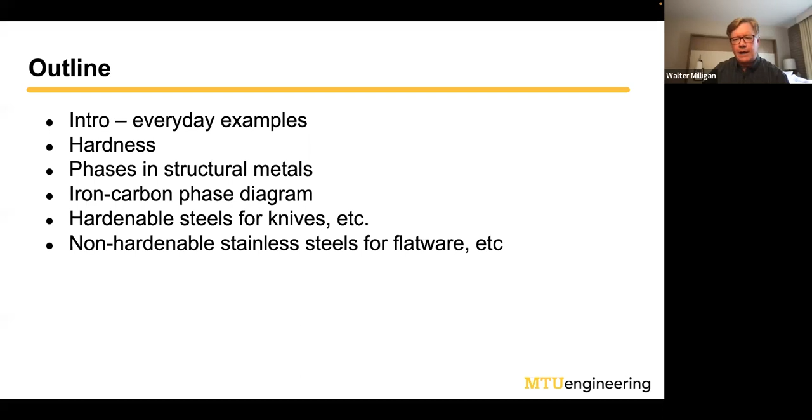First, I'll talk about some everyday examples, as mentioned in the publicity for the talk. I'll cover the concept of hardness and how we measure it, phases in structural metals, and phase diagrams so we can understand heat treatment. Then I'll discuss hardenable steels for knives, and non-hardenable stainless steels for flatware like knives, spoons and forks you might get as a wedding gift. We were going to talk about cast iron pans too, but I ended up with too much material, so I'm hoping I don't take too long.

If you ever go shopping for high quality steel products, you'll see the word 'tempered' a lot. Here are some examples. This is an ice scraper, and it says forged and tempered. You might have noticed on the New West Knife Works video that there was some forging going on—they put steel blocks into a furnace, got them red hot, and smashed them into shape, ending up with a knife.

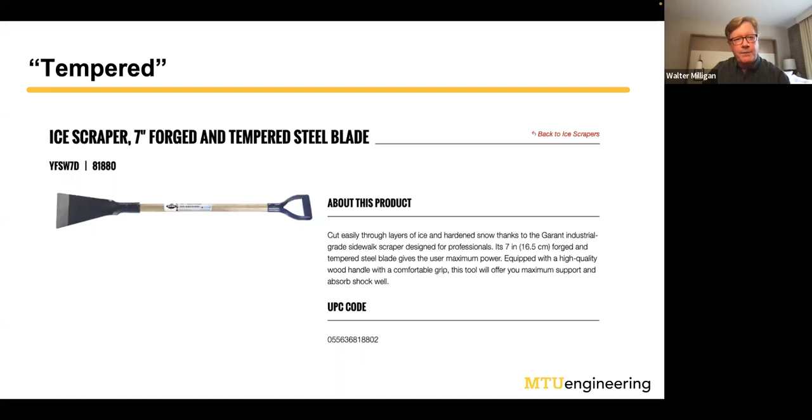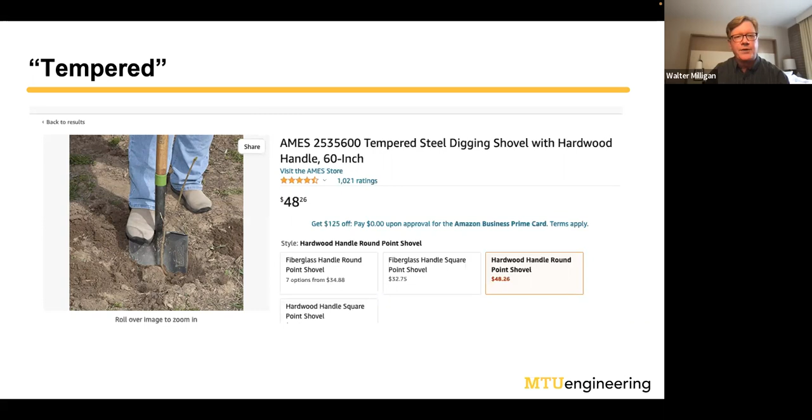Here's an example off of Amazon—a pretty expensive shovel, tempered steel. It's $50 instead of $12. The tempering is a heat treatment process that we'll explain in detail today.

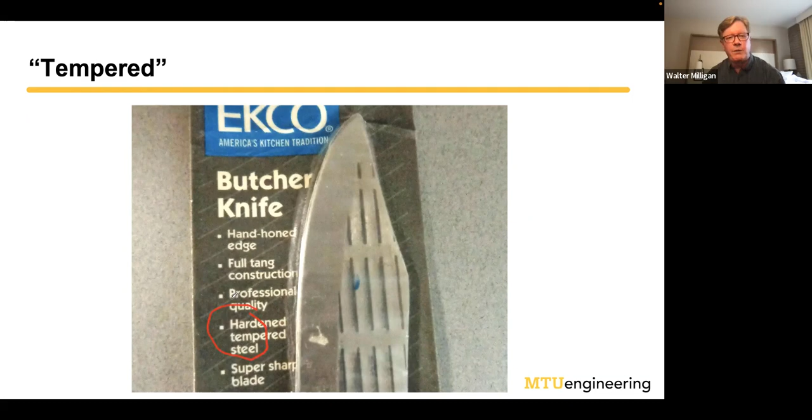I don't know how many people have seen the show on the History Channel called Forged in Fire. They have a contest where contestants try to make swords, knives, or something of a certain design, then go back to their garage and come back with their knives later. Here's an example of a kid who tried to make a sword. This will describe one of the processes in the heat treatment step called quenching.

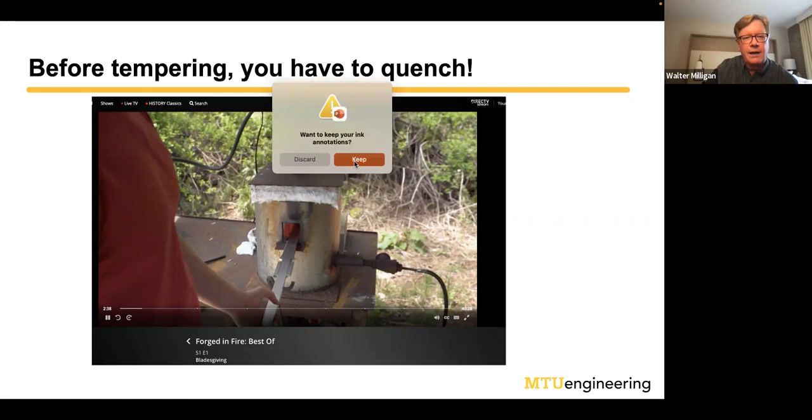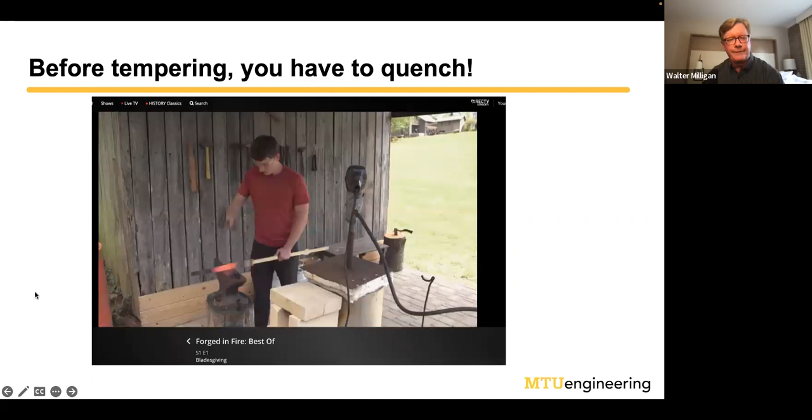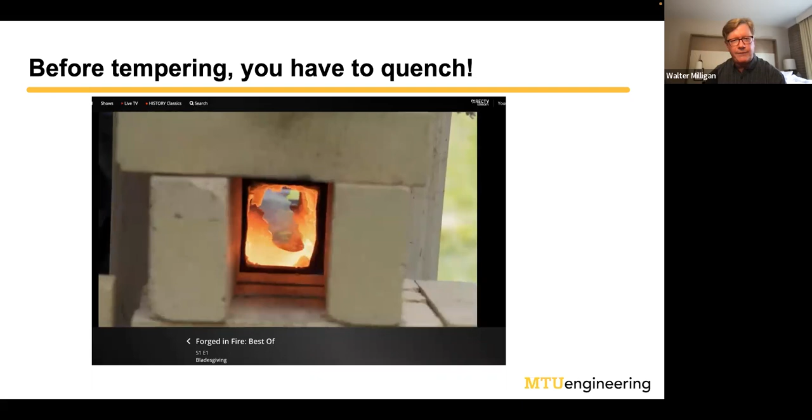He's smashing the sword into shape, he's got it red hot. After he smashes it into the rough shape he wants, he puts it in the oven and gets it glowing red hot. Then he takes it out and dumps it in a fluid. You can see that safety is not his strong suit. So the question is, why do we do that? Why did he have to take the sword he'd forged, put it back in the furnace, and then quench it? That's one of the key aspects of making a sharp knife, and we'll get into that.

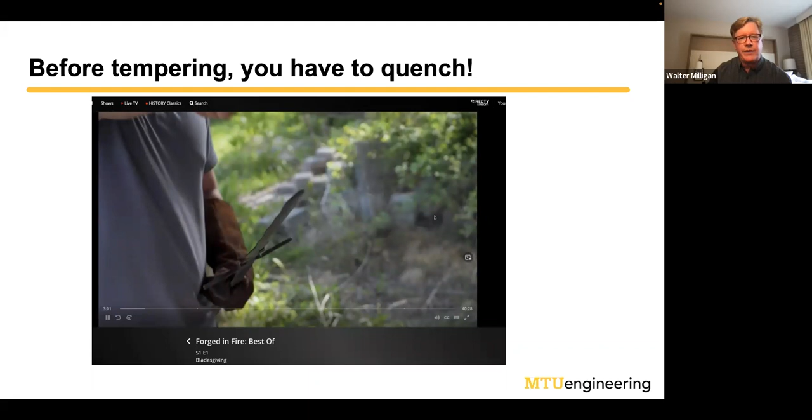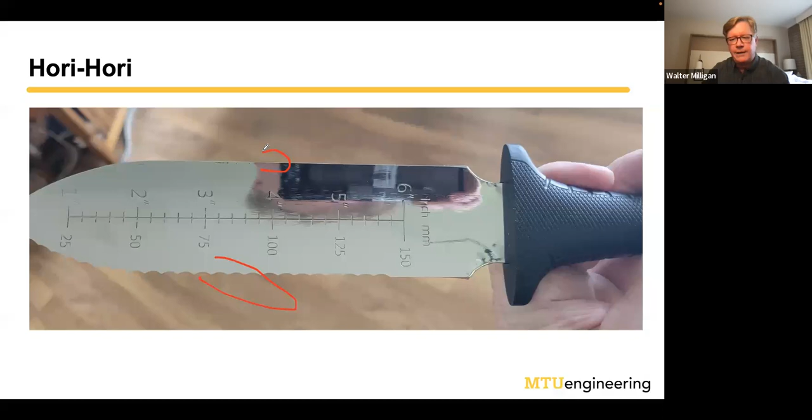Here's another example of a hardened steel device. I don't know how many people have heard of this, but there's a device called a hori-hori, a Japanese name—basically a sharpened garden trowel developed for planting bulbs and cutting roots in Japan. You can see it's got a scale on it, so if you want to put your bulb to a certain depth you can measure it. This one has a serrated edge down here for cutting, and a very sharp edge up here. This is also heat treated in the same kind of way. You can see it's got some curvature to it.

One reason I'm doing this talk is because Janet and I were talking about this. I got this from my wife—she likes gardening, and Janet loves gardening too. You should see the front yard of her house, it's beautiful, she's out there all the time. She liked this so much that she bought one for herself. We'll have another story about that later.

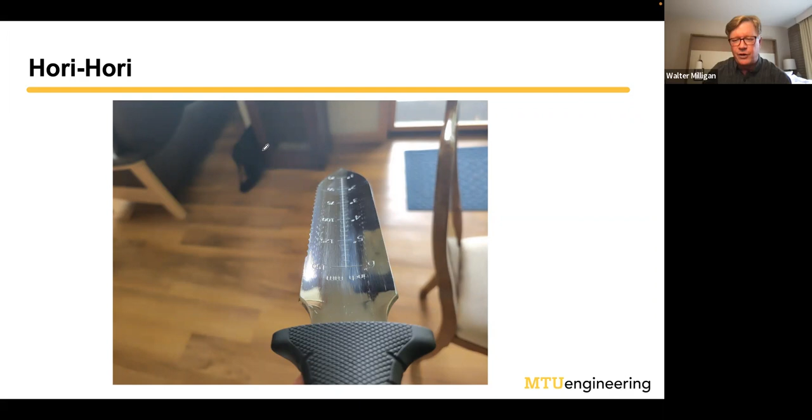This is the front of the case on the hori-hori that I bought. You can buy these for $12 on Amazon and probably at Walmart, or you can spend $60 like I did. And when you spend $60, you get a high-end stainless steel. I'll explain that composition a little bit later.

You can see down here, it says full quenching, and I'll explain the full part, which is a little bit more in depth than you might guess. It also tells you what the hardness is up here, and I'm going to explain what hardness means in a bit. This particular thing is heat treated to a hardness of Rockwell C58, which is not super high for a high quality chef knife, but it is very, very high for a garden trowel.

So what exactly is hardness? People have probably heard the term. Hardness has a specific meaning for metals, and basically it's tested by this benchtop device over here on the left. Every materials department and every factory that makes these kind of things has many of these in place. They're not very expensive, but they're on a benchtop. What they do is take an indenter, and the shape and the material that the indenter is made out of depend on how hard the metal is.

And I'll play this video, hopefully. It's not letting me use the pen and the video at the same time. So I apologize for going in and out.

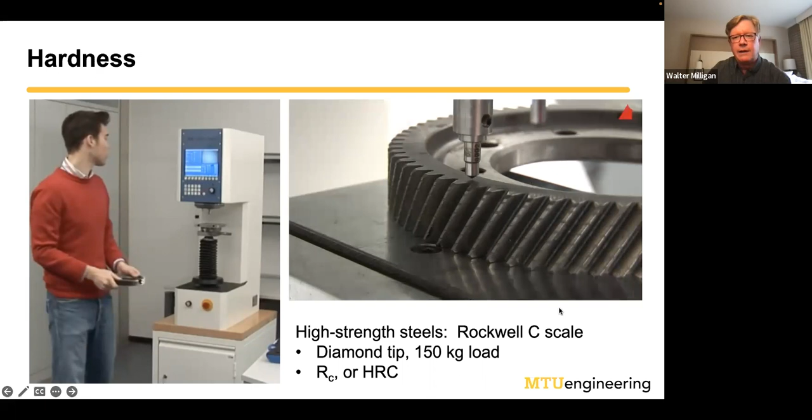In modern testing machines, the Rockwell hardness test basically takes that diamond tip indenter and it goes down and makes an indentation in the metal. I don't know if you can see it going up or down, but then the machine automatically detects the depth of the indentation, and the deeper it goes, the softer the metal is, and it displays the hardness on the screen. It's a very rapid test.

You can do this in 30 or 40 seconds. It's non-destructive, so you can actually test your part and then put it in service in some cases. This is the standard way we measure the performance of things like knife steels. Most knife steels are going to have the Rockwell C scale, which is what we showed on the Hori Hori. That means the indenter is a diamond tip with a 150 kilogram load, and it's reported as a hardness of HRC, or sometimes the symbol capital R subscript C for Rockwell C.

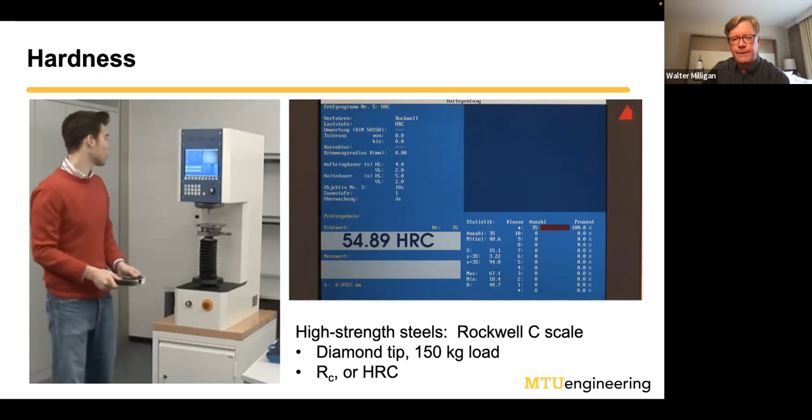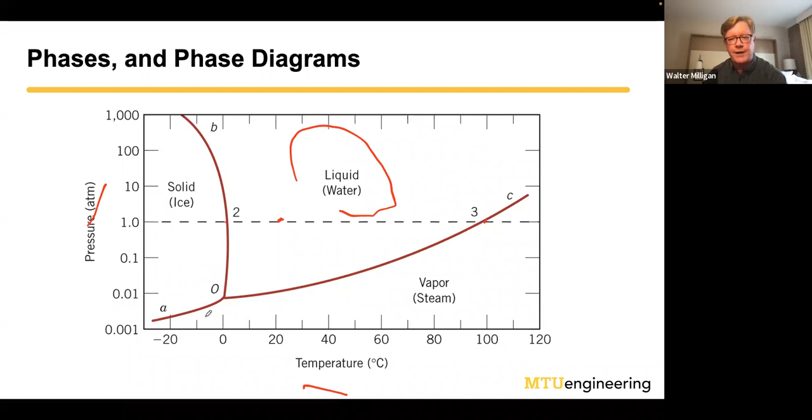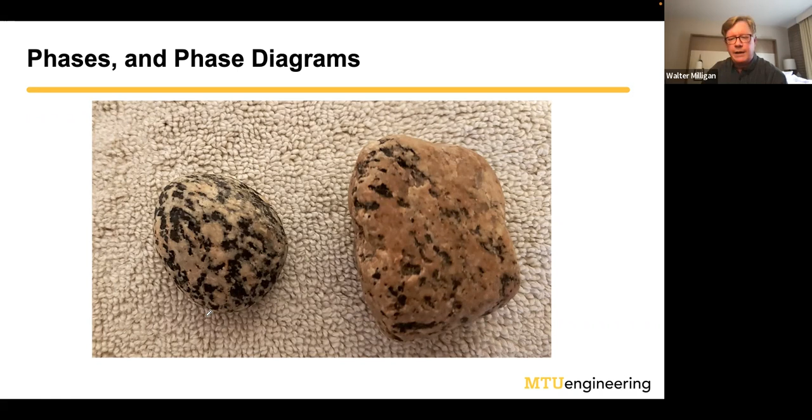It's going to turn out that structural metals have exactly the same thing as we showed on the rocks there. High performance structural materials are going to be made out of materials that are more than one phase. I almost didn't put this in, but I decided to put it in. Again, I apologize for having to get out of here. But basically, all metals are crystalline in nature.

So, for example, if you've got a chef knife, and it's nice and sharp, and then you cut into a bone or hit your cutting board a little bit too hard and it gets dull, what's happened is that billions of these defects have moved. That's why it changed the shape from sharp to dull. The point here is if I can take something in the microstructure and put it in the way of this thing moving, we can increase the strength. That's why high performance metals all have 2 phases, because the second phase can get in the way of this dislocation moving. When it does that, it increases the strength of the material.

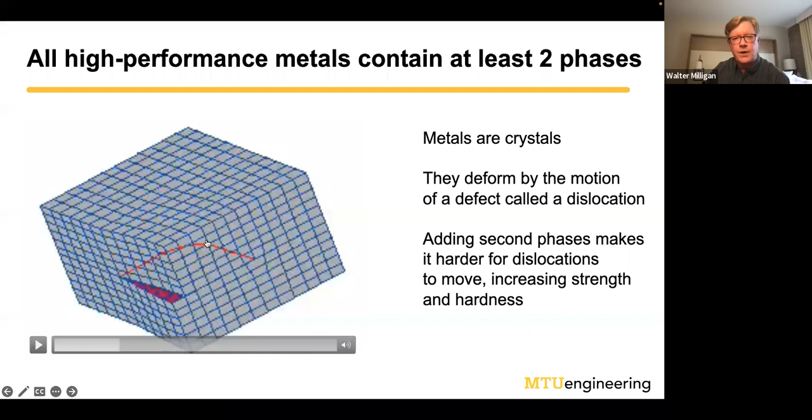I'm proud of you for using the dislocation word, Walt. Thank you, Janet. I almost didn't do it.

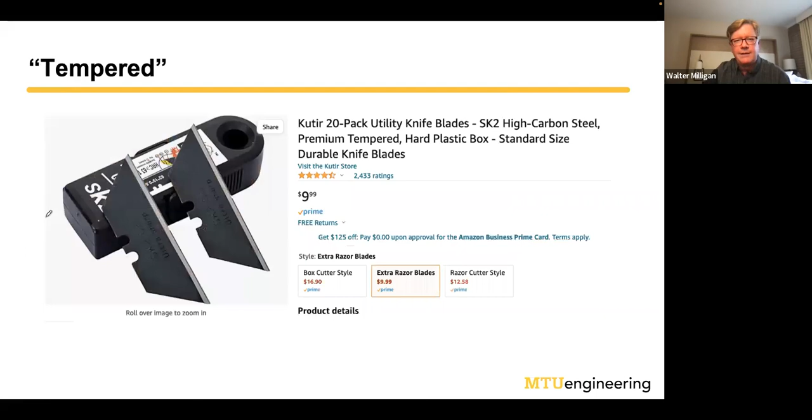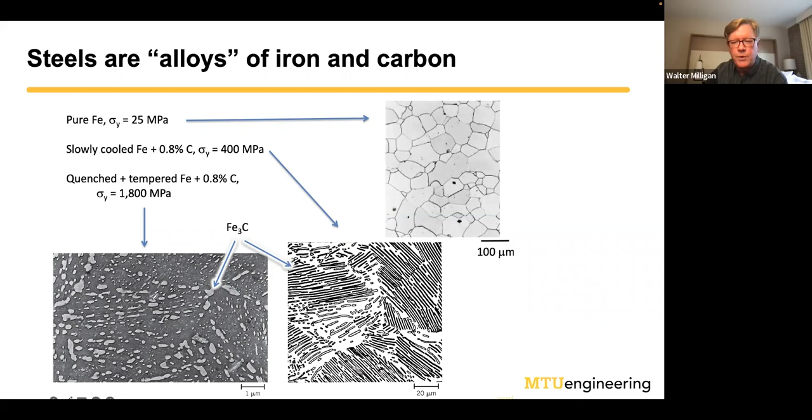So this is going to give us two phases, and that iron carbide phase is going to be able to strengthen the material. If I go back and look at this picture, these white blobs are the iron carbide particles, and over here these worm-like features are too. This one is at much higher magnification in an electron microscope. These carbide particles are much finer and much closer together than over on the right, which is one reason it's harder. Basically, the harder you want your steel to be, the smaller you want the carbide particles, so they're more numerous and closer together, so they can inhibit the motion of dislocations and increase the yield strength.

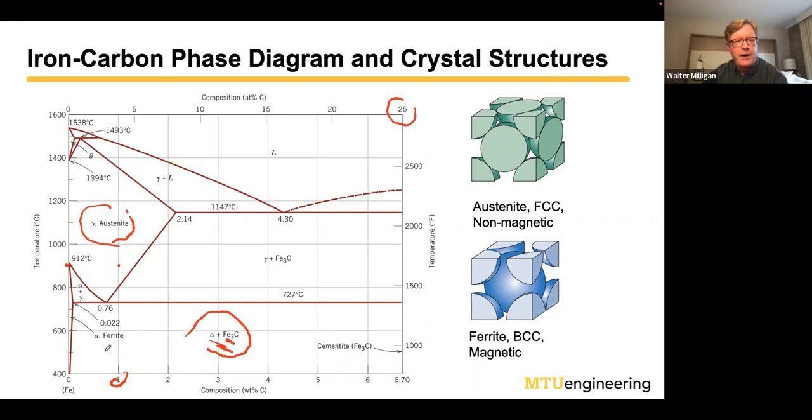It turns out the difference between these two phases is not just crystal structure, but also the austenite phase, which is at high temperatures, is not magnetic. And the ferrite, which is at lower temperatures, is magnetic.

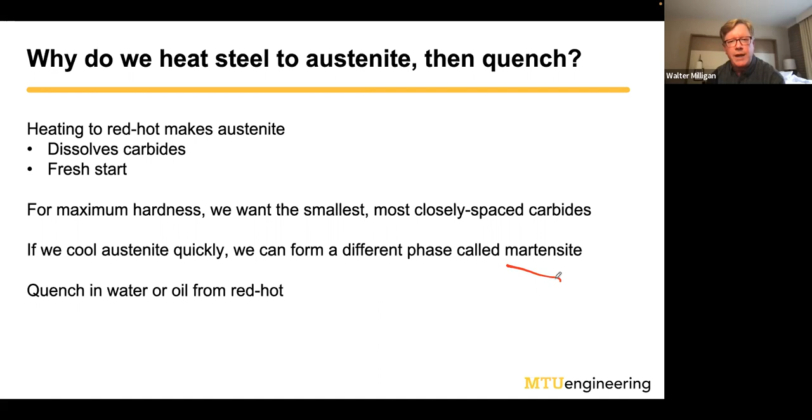The reason that works is we form a new phase called martensite that doesn't show up on the phase diagram because it's not an equilibrium phase. So we're going to quench the material from red hot in water or oil, and when we do that, we're going to transform the austenite into a new phase called martensite.

I'm going to show you some videos. Maybe I can do this without getting out of here if I do that.

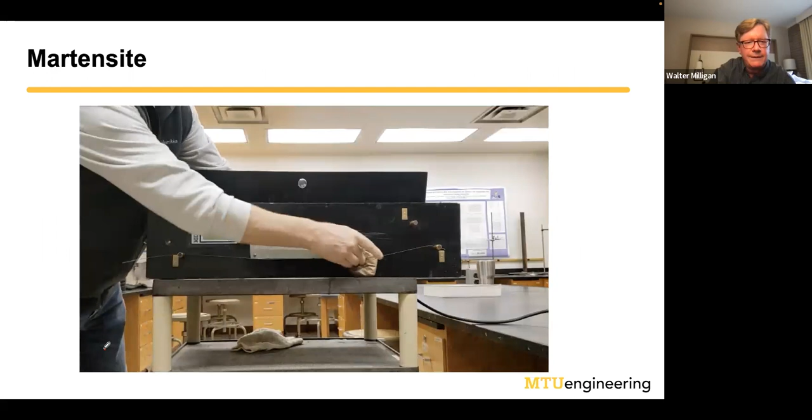So this is a device that we have in our lab for demonstrating heat treatment. Those of you that were at Michigan Tech before about 1993 will recognize the old MTU logo there on the upper left-hand side. What this device is, it's like a light bulb. We have two electrodes here, and we have a wire in the middle, and we can heat it up by just running current through there.

So you can see right now that this steel wire I have in there, this is piano wire, has been heated up. It's red hot. And what I'm going to do is I'm going to quench it.

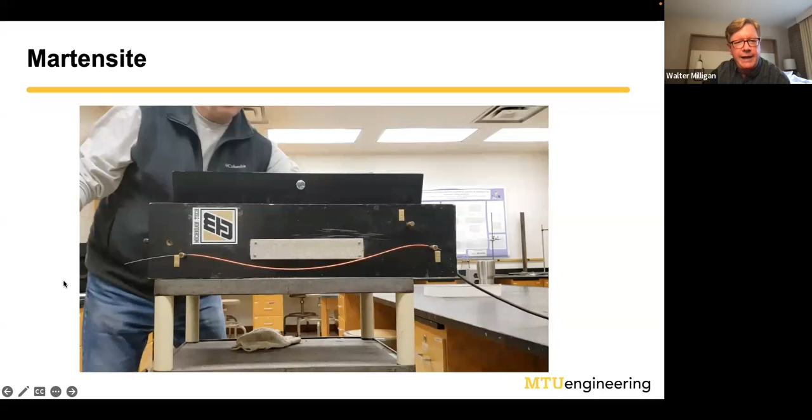I'm not going to quench it by dumping it in water because it's a wire. What I'm going to do instead is take a wet paper towel. I'm going to turn the power off, and then I'm going to quench it in that order.

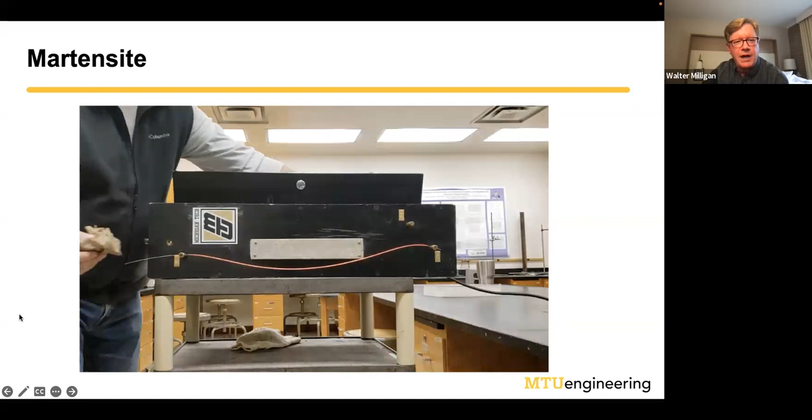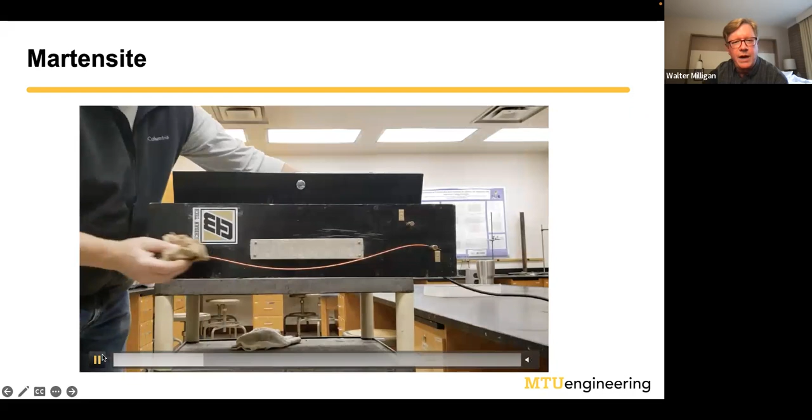So I'll play that again. It's red hot wire. I turn the power off so I don't electrocute myself, and I just hit it with a wet paper towel really quickly. And so that is a quenching operation. Then I'm going to show you in the next video what the properties of that material are.

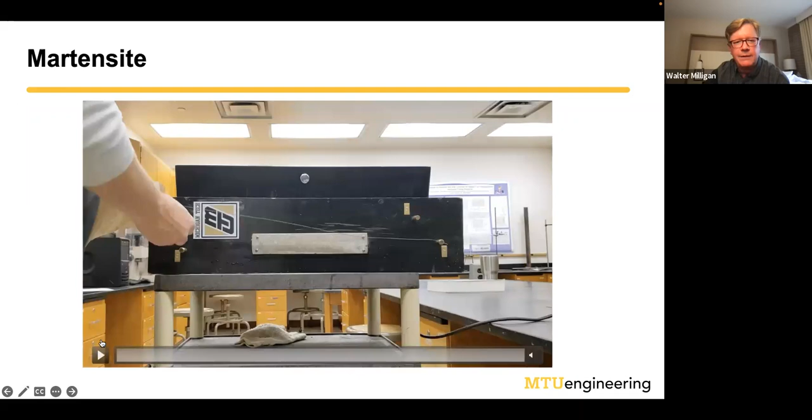Turn the sound off again. So I'm going to take the wire off of there.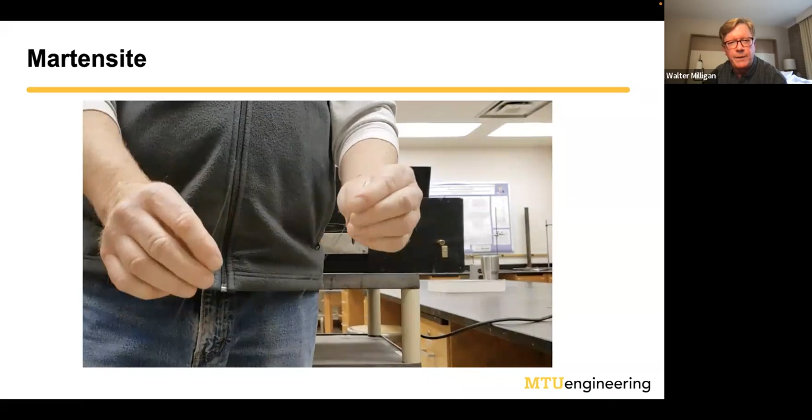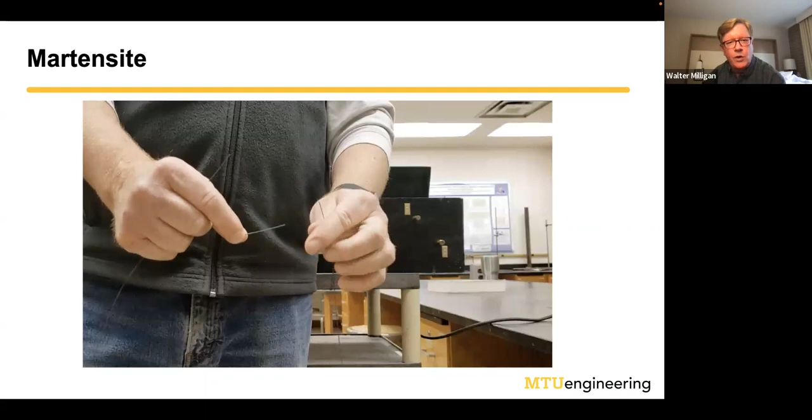It's incredibly brittle. It's like glass. If you would have done anything else to that wire, you could have tied it into a knot. This martensite phase that we form is absolutely useless. The reason that we form it is because it's an intermediate step in order to form the microstructure that we want at the end. So let's get into that next.

So why do we want to make useless martensite? The reason is we can take that martensite and reheat it to an intermediate temperature. These temperatures are typically around 200 or 300 degrees C, the kind that you could get in your home oven, like a pizza baking temperature. What happens is the martensite transforms to the stable phases of ferrite and carbide. That final step is called tempering.

So it's kind of like the steel was in a bad mood, so we had to temper it. I think that's where it came from, just shop jargon from 200 years ago or whatever.

So when you see these products online or at the store and they say tempered, what they mean is that we had a 3-step process. We heated it up red hot to austenite, and then we quenched it, and we formed a really useless brittle phase. And then we reheated it a little bit and tempered it.

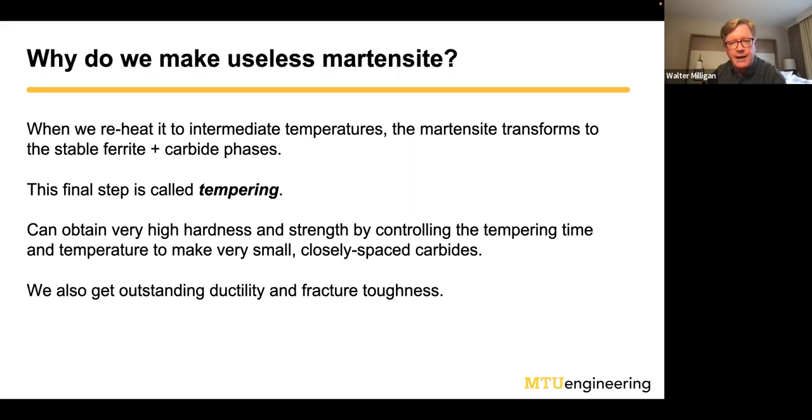And when we do that, we can have a very, very high hardness, and we can have very, very fine carbides, many of them that are very close together. So we can get a very high hardness and a very high strength. The amazing thing about these steels is they also have unbelievably high ductility and fracture toughness. That's one reason why these are so useful, not only in knives and things like that and in hori-horis, but also in a lot of engineering materials and components.

The way you control the properties after the quenching step is by controlling the temperature and the time of the tempering. This plot here shows a tempering curve. On the left-hand side, we have hardness, again in Rockwell C. On the x-axis, we have time in the furnace. This is the same steel that I showed you that we did the quenching on. So this is piano wire.

So, for example, you can pick whatever temperature you want and then pick the time if you have the data for your steel. So, for example, if I wanted to take this steel and temper it at 200 degrees C for about an hour, it should have a hardness of about Rockwell C62, which is harder than the hori-hori. It's also a pretty good hardness for a plain carbon steel like this. As you increase the time or the temperature, the carbides grow more quickly, and so the hardness goes down. It's not always a bad thing.

For the hori-hori, for example, which is not made out of this steel, we'll get into that in a minute. It turns out the hardness is about Rockwell C58, so it's not going to be as strong as it is here, but it's probably going to be tougher and more ductile and easier to form, and it might not be so prone to chipping in a very sharp edge.

So once again, the 3 steps we have to do here are: heat it up to the high temperature austenite, quench it to form martensite, and then after we form the martensite, we have to get rid of it. So we temper it for an amount of time, and the result of that microstructure is called tempered martensite, even though there's no martensite there. That drives students crazy in the intro class I teach, because it's called tempered martensite and there's no martensite there. We called it tempered martensite because that's how we made it.

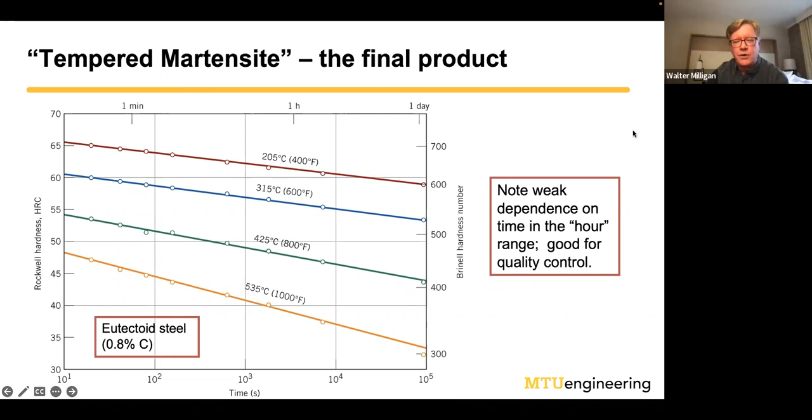I also note that if you're doing industrial operations, there's a very weak dependence on time. So if you go from 1 hour to 2 hours, the hardness only changes a little bit. That's a good thing if you're doing quality control, because you don't want your thing to get too soft if they left it in the furnace for a little bit too long.

So now let's talk about the real stuff. Let's talk about the stainless steels that those $400 knives are made out of. Piano wire is fine, but the products we're interested in today are stainless steels.

So the definition of a stainless steel is an alloy that contains iron and chromium. The reason they're stainless is because the chromium oxidizes on the surface and forms a protective coating. That coating keeps further oxygen from going into the material and oxidizing it, turning it into rust, or doing other bad things to it.

So all stainless steels have chromium in there. Some have carbon intentionally - we'll talk about that. Some require very low carbon - I'll talk a little bit about that. Some have nickel, and there's, I don't know, thousands of different kinds of stainless steels, but we'll talk about some examples of the most common kind.

So there are 3 basic classes. We can have martensitic stainless steels, and they are hardenable, just like we showed in the carbon steels, and the process is exactly the same - we have to austenitize, then quench, then temper. The carbides we get are different, they're not Fe3C, I'll talk about that in a bit. But these are hardenable and very high performance for knives and shovels and horis and things like that.

We can have ferritic steels that are not hardenable, much more low cost and much more affordable, with moderate corrosion resistance. And we can also have austenitic stainless steels, which are more costly and much more corrosion resistant.

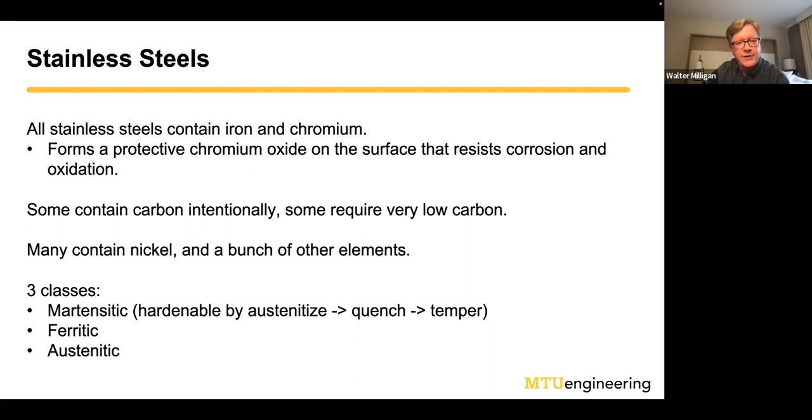So we'll talk about the martensitic stainless steels first. The most common one you'll come across if you work with these things is a steel called 440C. If you try to buy something online and they call it surgical stainless steel, this is usually what they mean. So you can see the composition up here - this has 18% chromium, which means it's much more expensive than plain carbon steels because chromium is expensive.

It's got pretty high carbon, more than the 0.8%, and it's got a little molybdenum in there for heat treating purposes. We do the same processes to this - we austenitize it, we quench it and temper it. It's strengthened by basically Cr23C6 - not just chrome, but it mainly is. And so we can get very high performance by doing that.

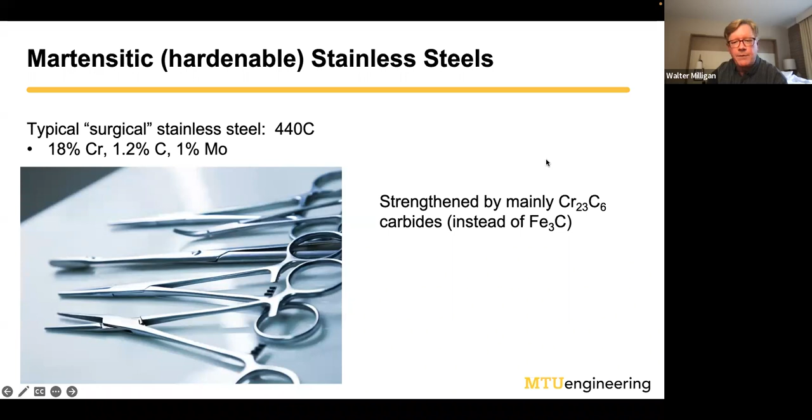And so the steps necessary in this knife steel, and probably in the knife steel that New West uses, I'm assuming, are: we have to austenitize and quench to get martensite.

Because of the composition of the steel, we don't get rid of all the austenite if we just stop at room temperature. That retained austenite will not temper, and it ends up being a soft phase that hurts performance. So when they say full quench, what they mean is they actually had to cryo quench it, put it in liquid nitrogen or a bath of dry ice, depending on the temperature, to get rid of all the retained austenite. Then they temper it. If you don't do the cryo quench step, you're only going to get 52 Rockwell C, because the retained austenite will be a soft phase in there, and you won't get the full benefit of the material composition.

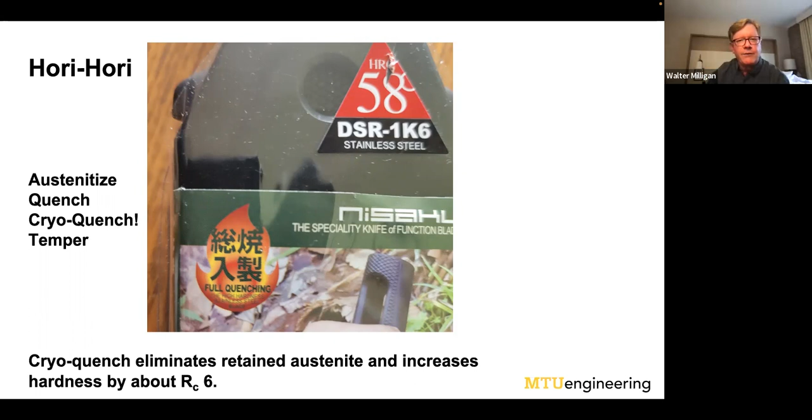This is a picture of my new hori, and if you read the label, you can tell the Japanese manufacturers maybe need some help with their translation of English there. It says 'the specialty knife of function blade' - don't know what that means, but I can tell you this serrated edge is very, very sharp, and this straight edge is incredibly sharp. It's 58 Rockwell, so it's not sharp for a chef knife, but for a garden trowel, it's incredibly sharp.

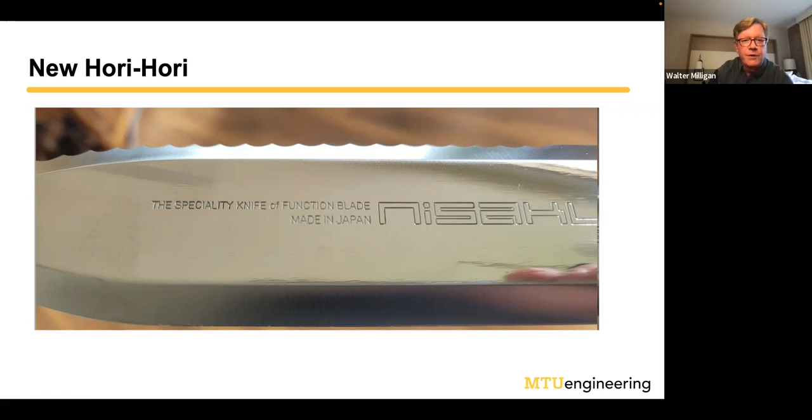Janet was digging in the garden one day using two hands, and she actually almost cut her finger off. So she got mad at it and took that knife and rubbed it up against a brick to get that sharp edge to be a little bit less sharp, so she wouldn't cut her finger off. It's still pretty sharp - just not so sharp that touching it cuts you now.

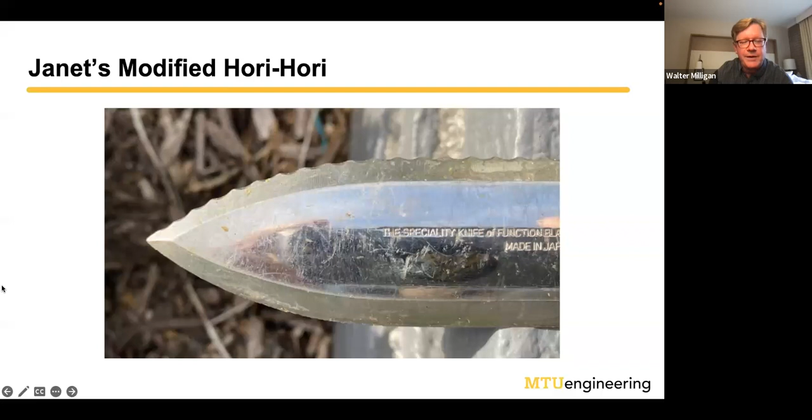58 Rockwell C is not bad for a garden trowel, or even for a kitchen knife. It's also relatively stainless - you can see there's a little bit of staining on there, but it's a really cool tool. I really like it. Janet does a lot of gardening; it's what she does a lot in the summer.

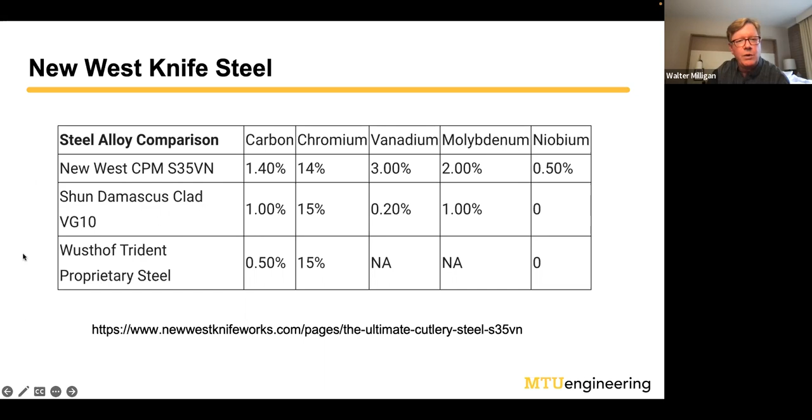In fact, New West has a lifetime deal where when your knife gets dull, you can mail it to them and they'll sharpen it for you, because if you're at 70 or 72 Rockwell C, that's going to be really hard for an amateur to sharpen. So it's a combination of good sharpness - it'll get dull quicker, but it's pretty sharp when you do it, and you can do it with one of those knife sharpening devices you can just buy in the store.

So a quick word about storing your knives. Hard, sharp edges can chip, so don't throw them in the drawer. I think most people know that.

I think I've used this chef knife every single day for the last 10 years, and it's held up great. Maybe I'm going to buy a New West knife after I saw what these guys make, because it looks pretty spiffy. But this has been a great knife, and I sharpen it every once in a while, once a month or every month or two, and it does a really good job.

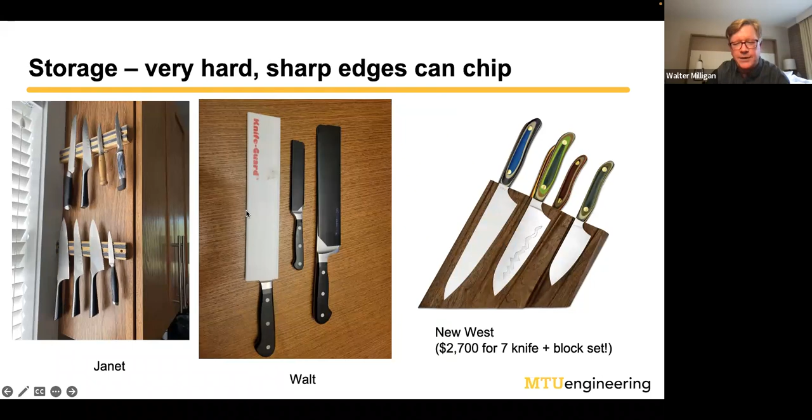Janet just bought one of these. It's a picture from the website because she's in Chicago, and even if it got here on time, she is not. No, it was delivered, I took this before I left. Oh, you got your knife. Mm-hmm, so it came with a leather sheath, I guess, right? Is that a leather sheath for it? Yep, it did. Yeah, so that's my approach here, except it's pretty leather instead of cheap plastic. So that came pretty quickly then. It sure did.

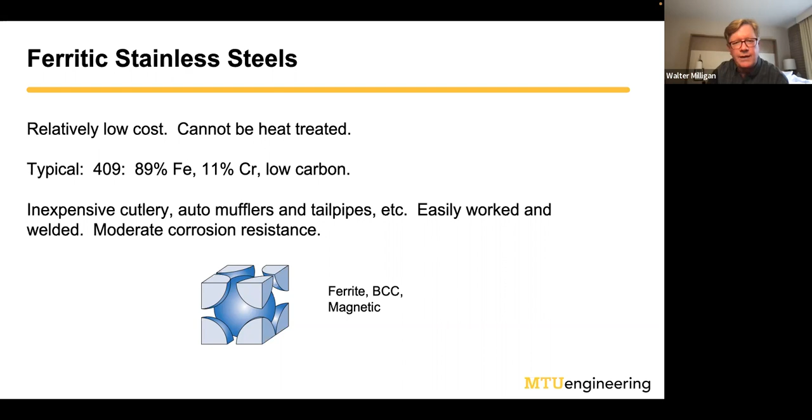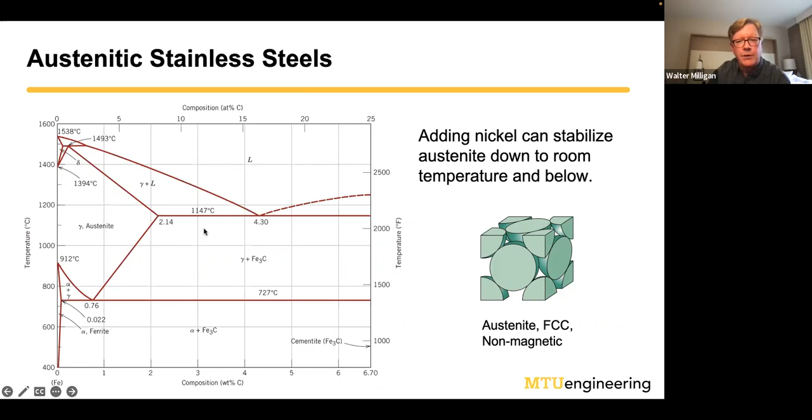The austenitic stainless steels are interesting. If you can add nickel to your steel, then you can take this austenite phase, which is not stable below 727 degrees C for a plain carbon steel—and 727 degrees C would be glowing red hot in the furnace, starting to glow red hot anyhow. If you went below that, the austenite is no longer stable. However, if you add nickel and chromium, you can stabilize the austenite phase so that it's actually stable at room temperature and below. So that's what these steels are going to be.

They're going to have chrome and nickel in there. The most common steel that people know about that's austenitic is called 304. Again, it can't be heat treated. It's got 18 chrome and 8 nickel. This is a very expensive material compared to other steels because chrome and nickel are both expensive.

In this particular case, you want very low carbon, because if you have carbon in these steels, they tend to form a chromium carbide phase at the grain boundaries, and that ends up giving you a corrosion problem. For example, if you're using this for a plumbing fixture, you can actually get pinhole leaks because of corrosion if you have carbides in there. So typically we want to have chrome and nickel and very low carbon.

This is useful for expensive cutlery like knives, forks and spoons. It's the most common material for plumbing fixtures. If you go to Burger King or somewhere, you see the shiny stainless steel countertops, they're all made out of this. It's also biocompatible, so some implant materials are made out of this. Once again, this is the face-centered cubic phase, which is austenite, and it's not magnetic.

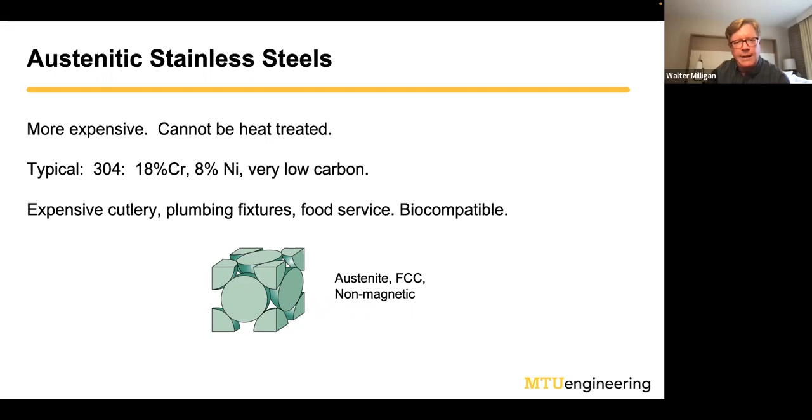So here's a demo that I filmed a couple of days ago about these knives or forks.

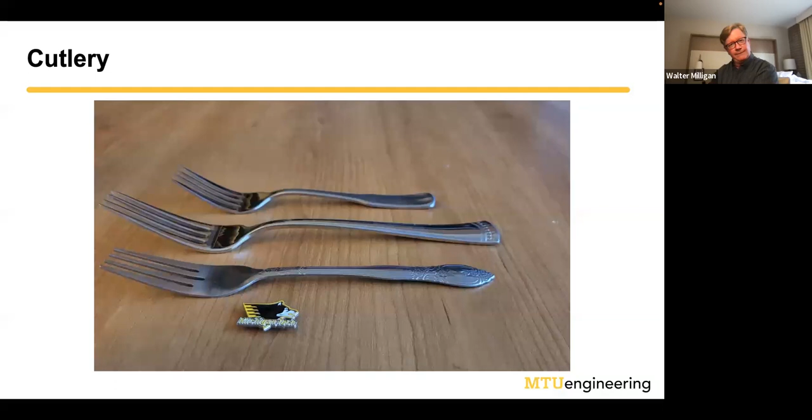To demonstrate the crystal structure that occurs in flatware you can buy at the store, I've got in front of me a magnet underneath the Michigan Tech pin there, and I have three different forks, and we're going to see how they behave when they come in contact with this magnet.

The front one is one that I paid $1.49 for at Walmart, and I have it at my office. It doesn't get put in a dishwasher, it doesn't get very much use, it doesn't have to look pretty, so I'm perfectly willing to pay $1.49 for it.

If I take that fork and put it anywhere near the magnet, you can see that it actually flew up and attached itself very, very rapidly. Once again, if I put the fork anywhere near it, it's going to fly up. The reason is that this is a body-centered cubic stainless steel, probably 409 or 430 or something like that — a little bit of chrome, no nickel, fairly corrosion resistant, and very much less expensive.

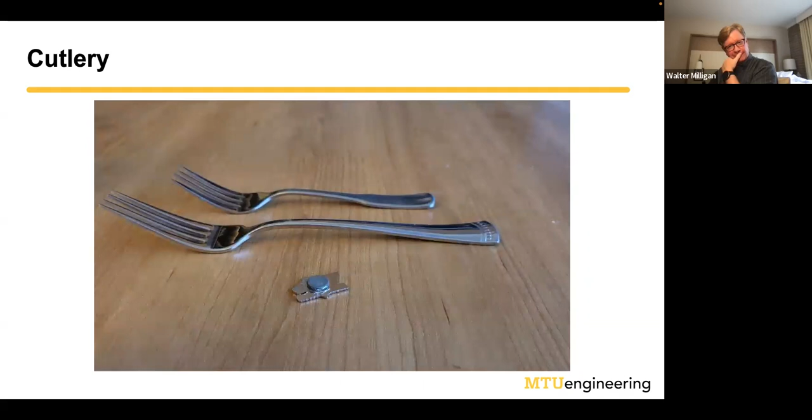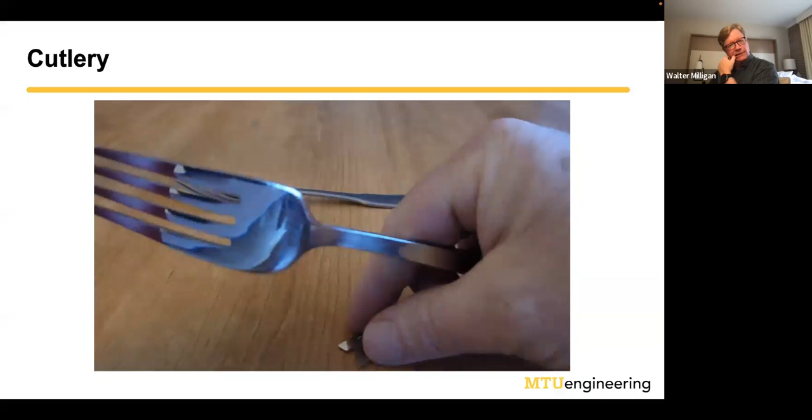The second one here is one that I think I got as a gift in a set, and this one is much more expensive. If I put that fork near there, it doesn't fly up until it gets very close to it. You can see that it also, even though it is somewhat magnetic, isn't nearly as strongly magnetic as the other one. So it kind of grabs on, but not really.

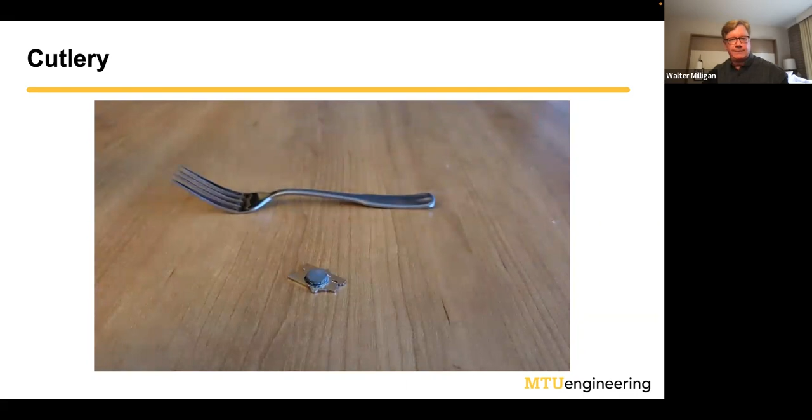Much less magnetic. In fact, you can put this through a demagnetization operation if you wanted to take the magnetism almost completely out, and that's one thing they do in industrial operations where they sell austenitic stainless steels. Here's the most interesting one.

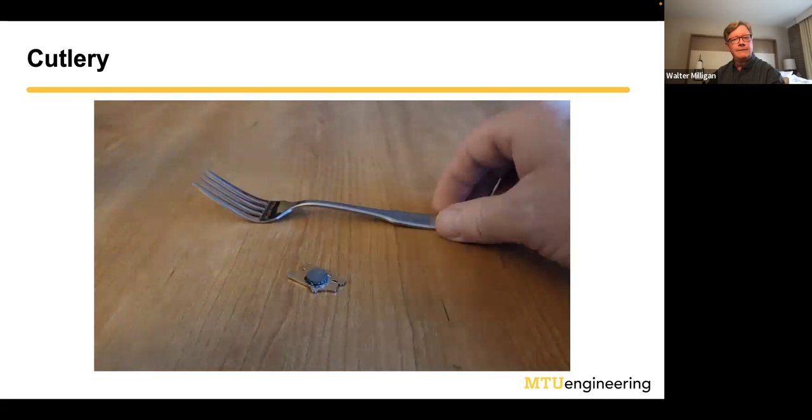This is a fork that my wife and I got as a gift a number of years ago in a set. It looks pretty fancy, and it was, I think, pretty expensive. So you would think that it would also be face-centered cubic austenitic stainless steel. And it turns out that's not the case — this is really interesting.

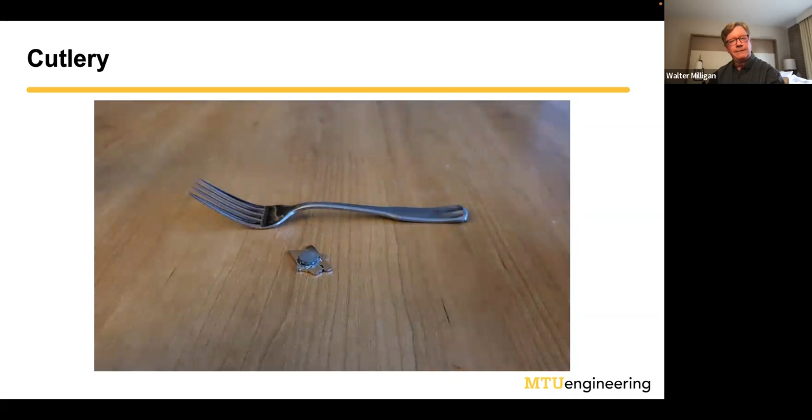I didn't really learn this until I made this video today and got a whole bunch of forks out of my drawer. But this fork, which was probably pretty expensive, actually is ferritic. It's body-centered cubic, and it's highly magnetic.

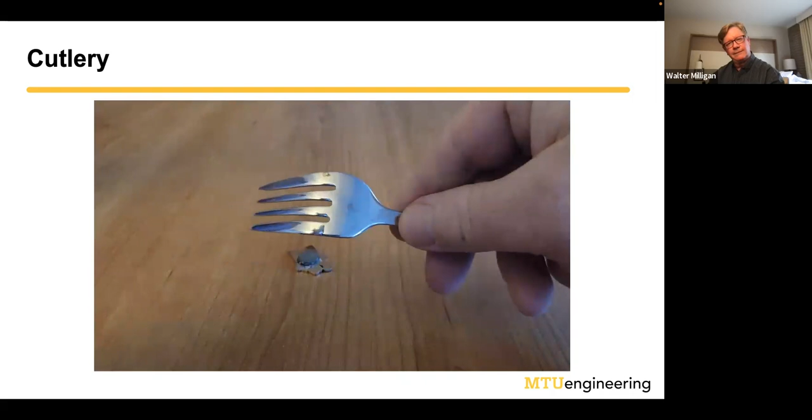And maybe that explains why, if you take a look at this thing, you can see the stain on there from the dishwasher. We've always kind of been mad at this set because the dishwasher ends up staining the fork. You can see that kind of orange stain there, and there's another one on the back that isn't showing up very well. My wife blames our water or our dishwasher, but really, it turns out the steel's cheap.

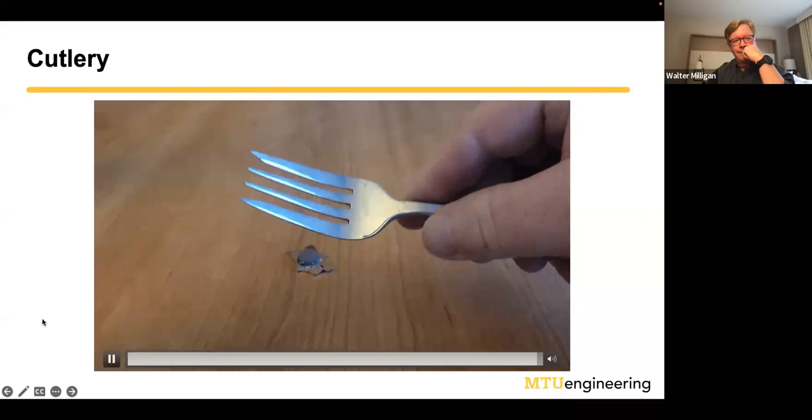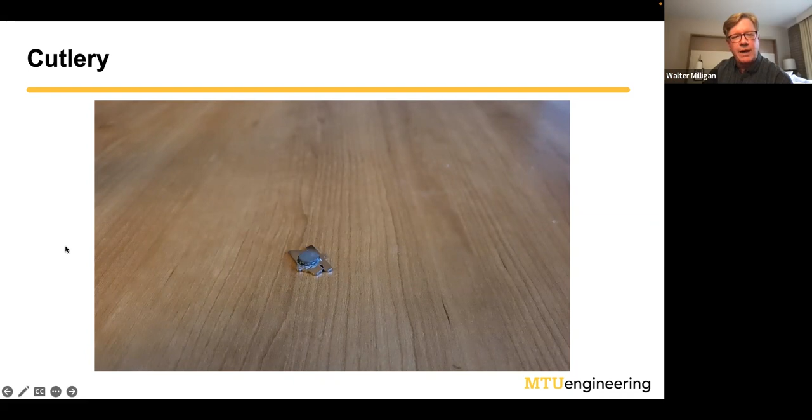And that's why it's not going to stain in the dishwasher like that one did. So I think that's all I have, and I went a little longer than I wanted, but I'll be happy to answer any questions.